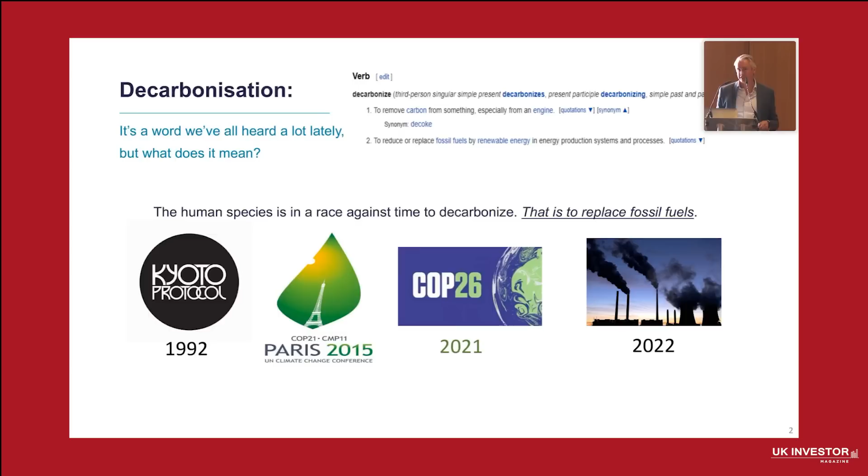Decarbonization. We've all heard this word, but a few of us don't really know what it means. The long and short of it is that we need to wean ourselves off of fossil fuels as fast as possible. We've all talked about Kyoto, Paris, COP26, but the stark reality is we unfortunately are still burning ever-increasing amounts of fossil fuels, and we haven't peaked yet. We've got issues where we have slippage in China with their 2060 target, and in India slipping to 2070. So still a major hill to overcome.

Many of you will think because you've got an electric car, or you've heard about wonderful new technologies out there like hydrogen and green ammonia, that we're already there. But unfortunately, we're still a long way off. Even the best lithium-ion batteries are 100 times less energy dense than petrol.

If you can imagine, it's fine for us with our car. It sits there 90% of the time. It's 1 to 2 tons. You can charge it very easily from your home. But a ship, a plane, they need to be moving 95% of the time to be commercially viable. And you couldn't, for instance, put 100 times the amount of fuel capacity on a plane, which currently reduces its fuel load as it flies. So long way to go there.

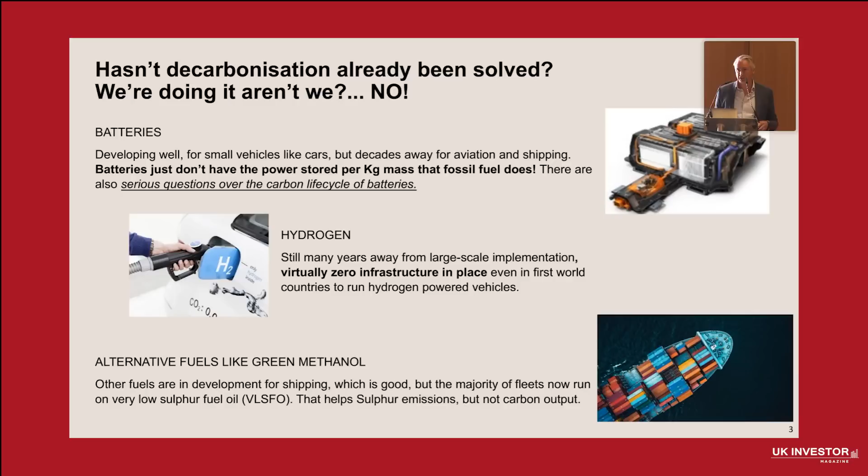Hydrogen's been around for years. I remember the experiments when I was a kid with electrolysis and the bubbles coming off. Again, great concept, but the infrastructure simply isn't there. Not even in the developed world, never mind the rest of the world. So many years to come before it develops. And then alternative fuels, well, great, they're there, but again, not commercially viable. Much of the shipping world is still very much reliant on heavy fuel oil and other very low sulfur fuel oils.

The problem with shipping is that the ships that are going to get built in the next 8 years are going to be the ones still around in 2050. So even with the advent of ammonia and hydrogen, we are not going to be able to solve that problem anytime soon. So luckily, there's a solution for the transition, and here I am to tell you about it.

So who are SulNOx? We are a company that's been around for about 10 years. What have we been doing for all that time, you may ask? We have been refining and patenting our fuel conditioners. We are now listed on the Apex segment of the Aquis Stock Exchange, and we're soon to list in the Americas on the over-the-counter market, which will enable us to gain further investors, particularly green investors.

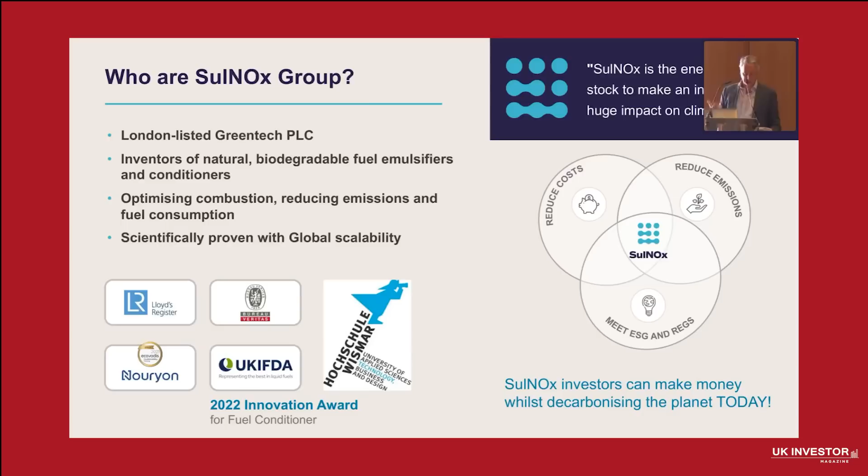There's lots of noise about how companies could reduce fossil fuel use, and lots of green talk, but SulNOx is an actual immediate solution to reduce fossil fuels, and it's available now, at scale. Increasingly society is demanding more of these companies—what are you doing from a green perspective? Clients are really important too. They're saying, well, I could go with you, but I'm going with them because they're using something which is making their footprint greener. So increasingly clients' demands are tied to ESG, which is great for SulNOx. We're there to help reduce emissions and create a great ESG story. So very important.

Let me tell you a bit about our petrol fuel conditioner here. This is something you and I can buy on Amazon and pour into our car. The idea is to eventually get it into the pumps, but we're not quite there yet—we're just getting going. In principle, we have three products. One works with all petrol, all diesel, all biofuels, and less viscous heavy fuel oils and marine fuels. The second product is a pure emulsifier—we can add up to 30% water with it and mix it, which is great for reducing costs and emissions. We've shown this product, unlike any other out there, stays mixed with fuel and water for 5 years and counting. A game changer for those who know the science.

This is called ship slops. At the moment it's taken away, treated and burned—basically a waste product. What SulNOx can do is turn that waste product, which ships currently pay people to take away, into reusable and actually enhanced fuel. This is a really exciting product we just developed. It also works with crude oil, so tankers that ship crude oil around the world—we can take that crude oil that's washed out of the tanks and turn it back into use.

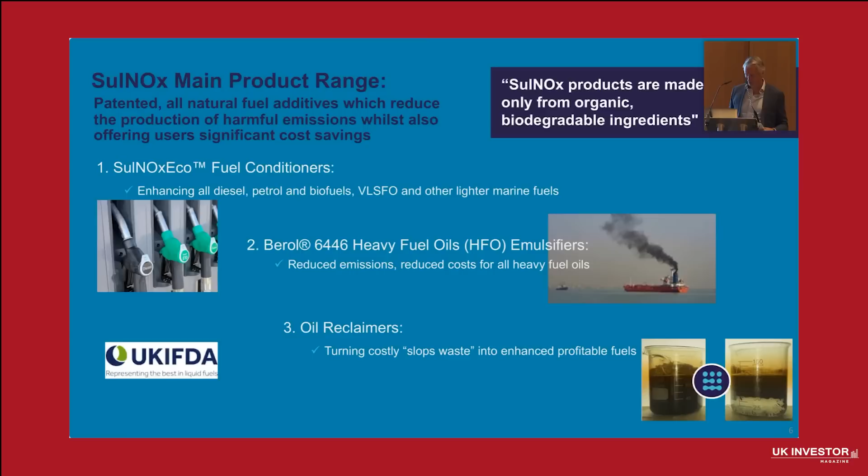Importantly, we don't make the products ourselves, and this is incredibly important. The company Nouryon is owned by a private equity firm called Carlyle Group in the States. The company was formerly Akzo Nobel, or ICI for those of you as old as me who remember that far back—a massive global chemicals company. They make the SulNOx product, and they make it as green as possible. The products are all natural and biodegradable, and Nouryon makes them in the most sustainable way in terms of how it sources its products, its processes, and how it treats its staff—all the S and the G that go with ESG. So we chose them; they're winners and proud of their EcoVadis Gold Award.

We don't have any waste refinery products in there. Most competitors have naphthalene or xylene or other waste petroleum products, which do not actually reduce emissions or improve fuel consumption. All they do is make the fossil fuel burn brighter and harder. So if you imagine squirting lighter fluid on a barbecue, that's what's happening when you add a typical fuel additive.

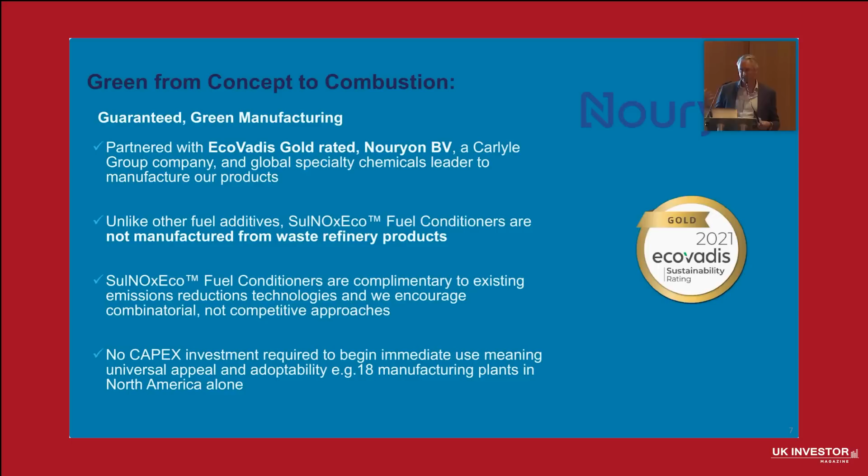What we're doing is improving the way the fuel burns, and we do this in 4 ways. Here they are—this is the sciencey bit, so if anyone needs a quick snooze, now's the time. At its core, SulNOx has powerful natural emulsifiers, as I mentioned. Emulsifiers allow two things that don't want to mix to stay stable for an extended period of time—this is the case with fuel and water.

They don't want to mix, so the SulNOx emulsifiers use the free water that's in fuel—and all fuel has free water in it. It's legally allowed to have 200 parts per million, and many have more. Through condensation, water builds up in fuel tanks. We take that water and pull it into the fuel, and then as it goes into the combustion chamber, the water encapsulated by the fuel heats up to 100 degrees and vaporizes. When it vaporizes, it scatters the fuel particles, enabling more oxygen to come in because there's more surface area for the fuel to access. So in effect we add a way of enabling better combustion.

In addition, diesel particles particularly, and other more viscous fuels, are very big, so oxygen cannot penetrate—there's always an oxygen deficit. What we've got is a clever substance in this conditioner called a glycol ether, and when it breaks down in the combustion chamber, it releases more oxygen. So we're providing more oxygen and using any water in the fuel to enable that combustion. But we're not just making the fuel burn better—we're improving the whole fuel journey, starting from when you're filling up.

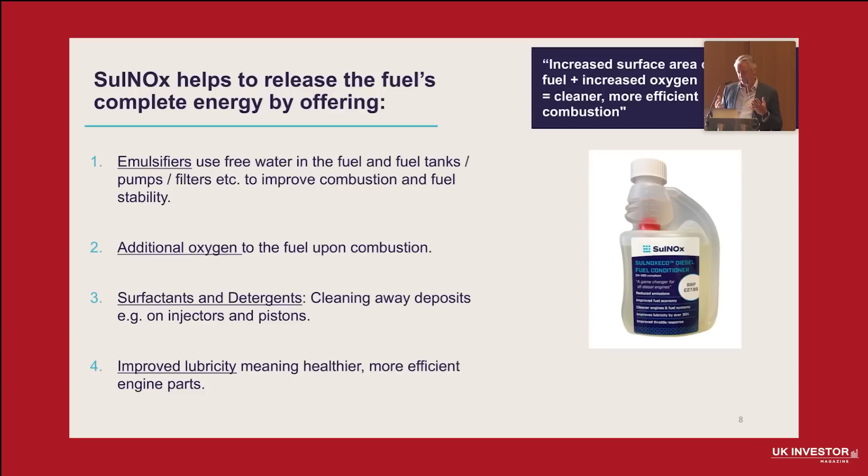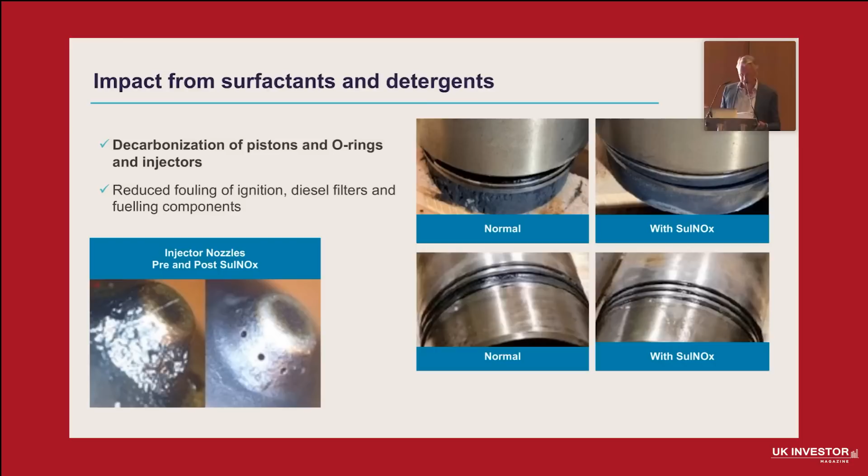Again, on the left, fuel injectors spray the fuel out. Obviously, if the holes are blocked, it's not going to spray fuel as well as it should be doing. So these are the stats, which are very compelling.

At a time when we're all suffering from raised fuel prices, as we just noticed with the big question from the audience, SulNOx is actually able to reduce costs by 10% or thereabouts. For cars, recent studies show a 13+% improvement in combustion. So if you're filling up and it's costing you £100, and we're taking 10 to 13% off that fuel bill every time you fill up, or you're going 10% further in your kilometers or miles, it's a major fuel saving, and this is why it's a game changer for all the big users of hydrocarbons across the world.

In addition, because of the lubricity, and because of the way we're cleaning everything and giving your vehicle, or the mining vehicle, or the big ship, a constant service in a way, we're also saving on maintenance costs. I can give you an example: trucking companies have been using SulNOx for a long time. I'll show you the stats in a minute. They think they're saving 2% in addition to their 8% fuel costs. So they're not having to replace their particulate matter filters, and they're not getting the trucks towed back to base because they've broken down or gone into limp mode due to poor fuel combustion. So another big story there.

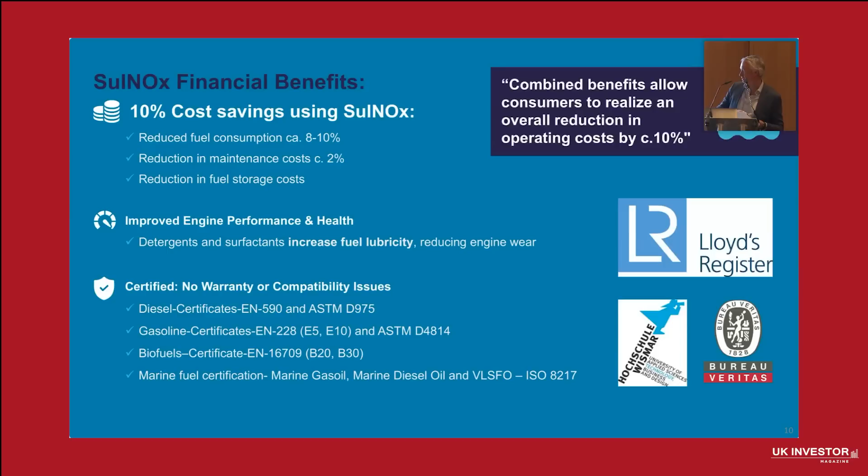On this page, unlike all other additives, we have letters of no objection from big trucking companies like Volvo, MAN, DAF, and Scania, because our product does not take fuel outside the bounds of the standards. These are the standards listed here for Europe and the Americas, and also for marine fuels, which is why Lloyd's is up here.

So it's not just fuel cost reduction, it's also a huge environmental benefit. We should all be thinking about how we can reduce our carbon footprints. Quite obviously, buying an electric car takes many thousands of miles, maybe 60,000 miles of driving, before it starts to pay back the carbon footprint from creating it. SulNOx, on the other hand, is immediately starting to mitigate emissions, so it's fabulous for the circular economy. My old Toyota has done 200,000 miles and the engine runs beautifully. Suspension, not so good, but I can't help that. To give you an idea, it's adding many years to various vehicles.

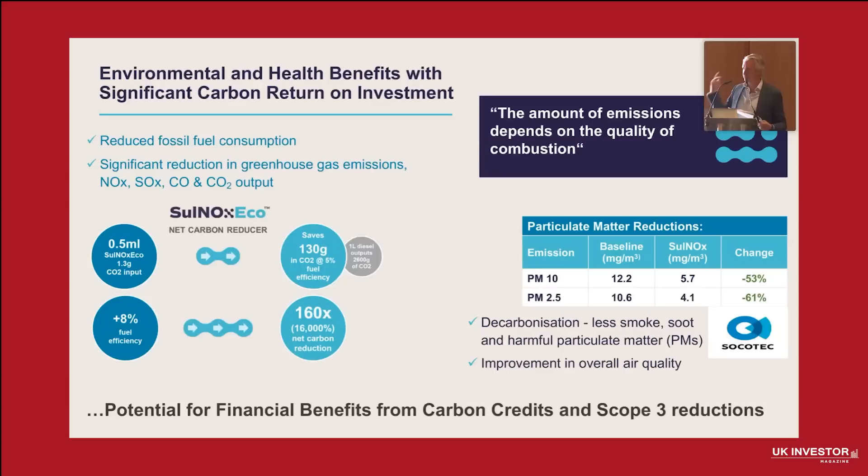So overall, it's a huge market, and it's a huge opportunity that we are just starting to get involved in. The estimate we have is that we can enhance 70% of every barrel of oil. So we can improve every diesel, petrol, heating oil, heavy fuel oil, biofuels user on the planet. So it's hard to replicate - it's all patented in over 70 countries now, and/or patent pending, I should say, just to disclaim it slightly, and it's not something that's easily replicated.

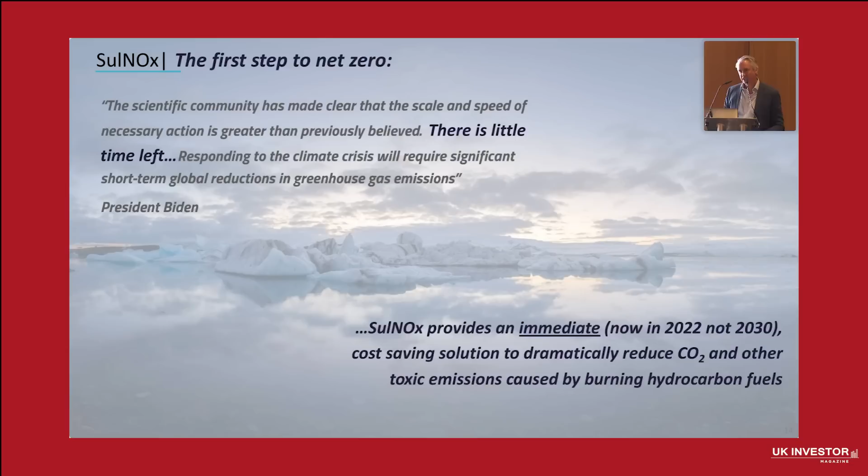Then this is the story - we haven't got much time. We've all got to do something, and we can do something immediately so that the hill for the future, where we all hope we'll get to with hydrogen, etc., can be mitigated as much as possible. So with that, I'll say thank you very much and ask anybody for any questions. Thank you.